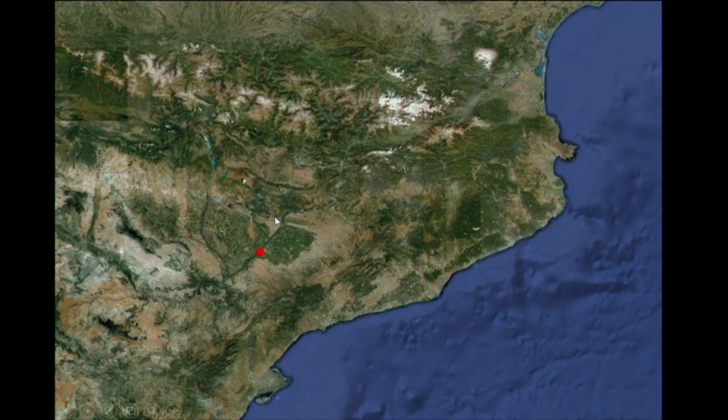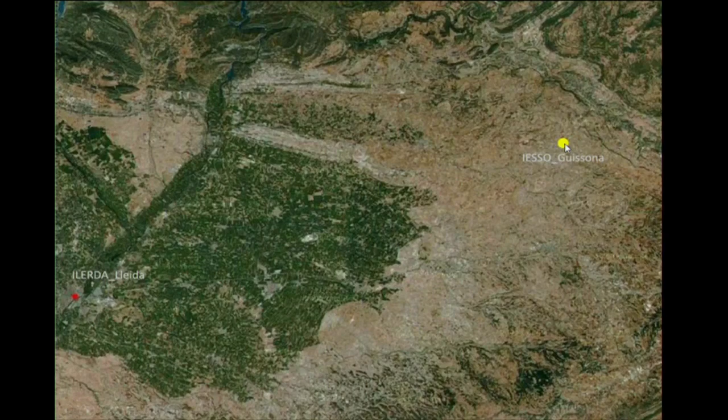And here, the Roman people, when they arrived from Italy via the Via Herculea and after the Via Augusta, in the second Romanization, one of the sites they established is Iesso, actually Guissona city. Guissona is in this part. Here is Ilerda, Roman Ilerda, in actuality Lleida. Guissona is in this part with an agricola system where they worked with wheat and different elements.

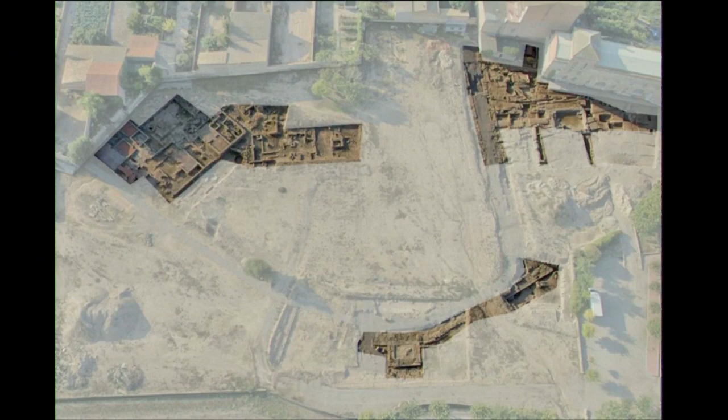They work principally with the earth, because they take this material, put it outside of the archaeological site, as store sites, and then we work with the same material. The decision was not to put the water outside.

Because if we do a canalization, we need an inclination with these canalizations, and under the earth we have the rest of the archaeological remains. We decide to work with lamination surfaces, like rice fields, and with this earth we build different taludes, compacted.

When it rains, the water goes to this side, and during the next days after the rain, the earth filters this water, protecting the rest that is not excavated, and protected from this external water, the actual archaeological site, and the inundability is protected from this fact.

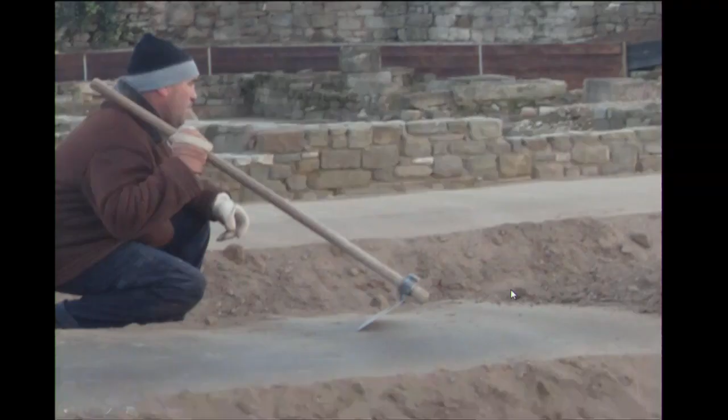This easy movement to move the earth another time from the archaeological movements will return in the interior, but with this geometry, and after compact with this technique, with slices of 10 centimeters, 5 slices of 10 centimeters, 50 centimeters, with the same attitude as the other people.

This is the builder or agricola man, and works with this technique, working these new fields, but it has the conditions that protect from the rain, that it builds during the time, builds, the time not destroyed.

The time is a process that in the first summer, some rains make this first movement, after in the autumn, after with the cold in winter appears this kind of lichens, and after you cook all the plate, in this case, and the time, like in the kitchen, you use it to build, and this is part of the process.

But this geometry that we work with is the geometry of the ancient Roman city. We put the inclined planes and the taludes in the position that you build the cardo maximo, cardo minor, intervallum.

And the different insulas that you have under this earth with the actus, and we offer one system so that in the future archaeological campaigns, people have a system to continue their work, the archaeological work, okay?

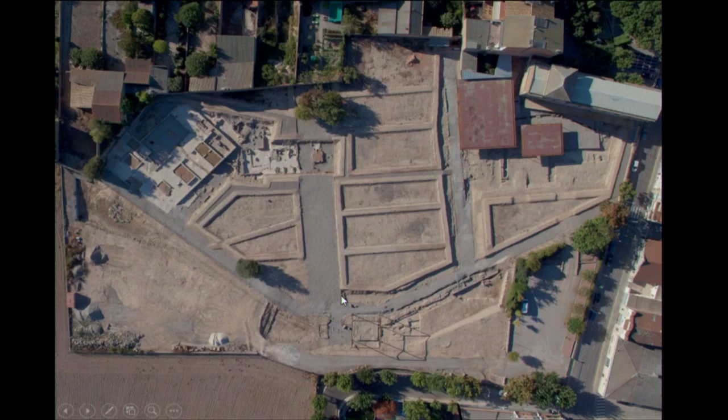The tower, we work with only the perimeter of the height that has the ancient muralla, and from this situation, with minimum resources, we put in value this action, offering a new system for the future archaeologists.

This is the budget, this is the surface, and in the limit of the north part, we work with similar instruments to all the lands that are worked around with the agricola system, but with an archaeological program.

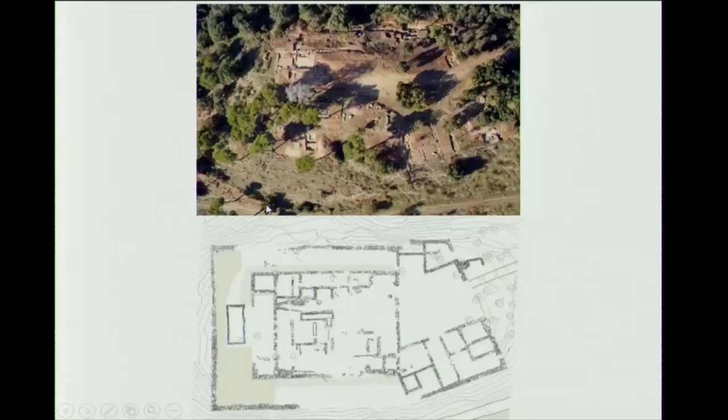In this site, in this south part, we have this element that was 70 meters higher than the rivers. This archaeological site in 2008 was the plain of a Roman palace, where there was an important political or military man that came from Rome to control the execution of Via Augusta.

This was 100 years before Barcino, before Barcelona, and 100 years after people of this site go to the city—this is only a temporary situation. He lives here with his family or his people, protected maybe by soldiers or people that work for him. This is the first protection, fortification. This is the second one with the house, the domus, with an impluvium here, a patio de armas, one tower, two towers, three towers, one cistern, and the big cistern tank on the other level.

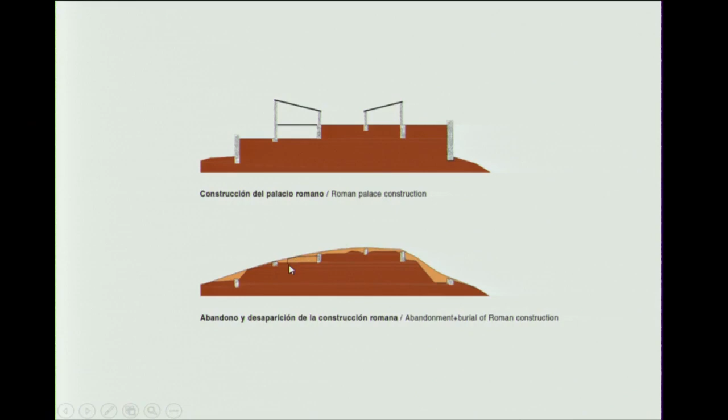This is the generic section of the Roman condition. After the abandonment of the Roman construction, during centuries it disappears, and then the archaeologist rebuilds a new condition, a new situation, discovering the ruins, discovering different elements of these rooms. Working with these elements—in this case not only earth, but also rocks, Licorella stones—this new reality appears.

And here they needed us to put in value with a contemporary program and a site that people can visit, putting in value the restored remains and understanding what it was. But...

I think trying not to rebuild the ancient condition, but putting in value the matter, the real Roman walls. In this case, we reuse the same material that the archaeologist put on the exterior. We reuse material from one ancient Roman quarry that is 100 meters near, and we build the back part of the Roman walls with a new system that builds these horizontal planes where the Roman people used to walk.

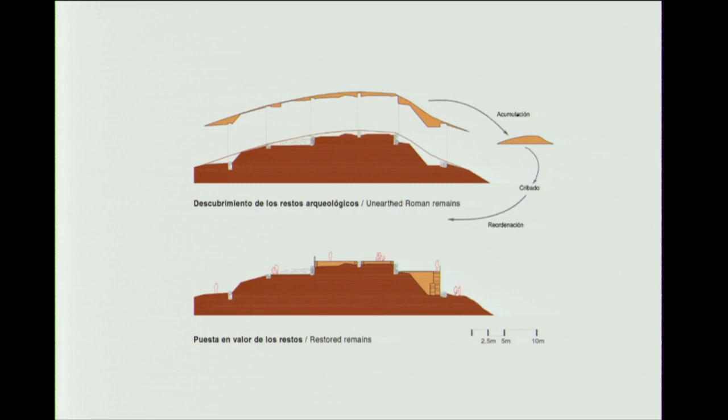To do this, we work with a dry system, working only with two materials: the stone of the mountain and the steel of the industrial polygon. This is the movement that we do—we put the matter into the rooms and we put in value the air that is in the walls. The walls don't exist, but the air explains the ancient dimension of the walls.

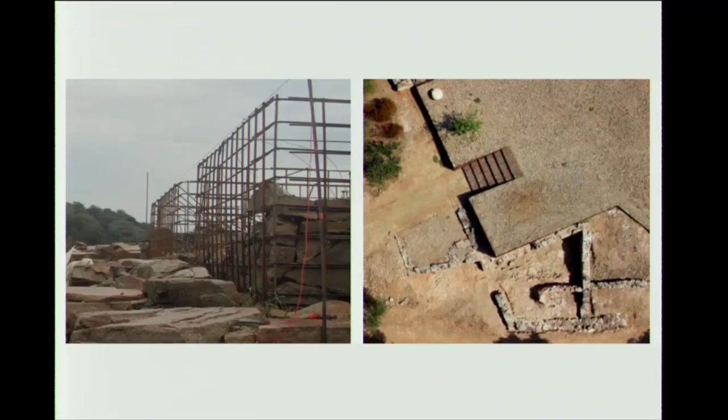This is the system, 15 centimeters separated from the Roman stones, working these lines—the entry, the patio de armas, we put an almond tree, etc. These are the first indications from the archaeologists to explain the different lines that we needed to build, the system of traction and compression of the different walls. This is the whole cycle of the process, from the Roman people to the restored remains.

This is the Roman walls that 2,000 years ago arrive to this level. This is the level where the Romans walked, but now we offer this condition, putting in value this air that actually doesn't exist, but the foundations or the first stones in the first meters of this rest do exist.

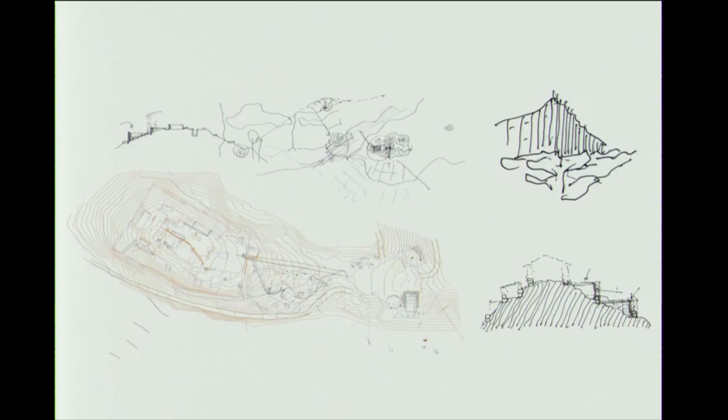During the construction we lived with the archaeologist. Here is the first weeks of construction of the domus, of putting in value these principal walls of the domus. It's a fantastic moment where we work as a team.

Then we contain it with this structural system, but after we put a thin curtain with even thinner rebar—this is 10 millimeters, this is 6 millimeters, this is 15 centimeters, this is 3 centimeters—because otherwise the two Licorellas, the one from 2,000 years ago and the actual Licorella from the ancient Roman quarry, undergo the same process of oxidation, and it seems like the same stone, but there's 2,000 years of difference.

So we need this thin curtain, using the tangential vision of the steel or the frontal vision, to put in value the Roman stones, and to put this curtain in the time that separates the two elements.

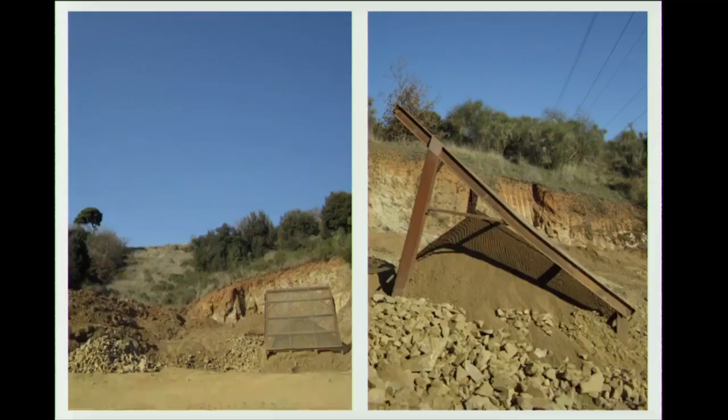But as you see in the other part, the limit that we work here in the more external parts, not at the top of the mountain, we work with the same structural system that we put as a veranda, because the difference of level is 2 meters or 2 meters 20.

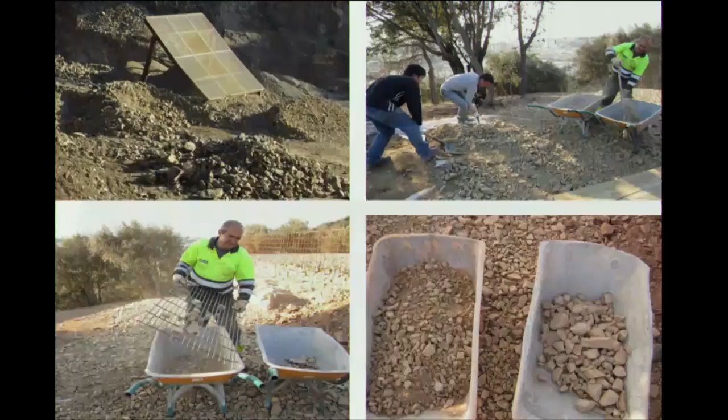And this is the ancient Roman quarry that we reactivate. The last activation was in the 17th century, and we reactivate it, and after, when we finish with this new material that we need to find, we put earth, and actually the local vegetation activates the new place.

We built this filter, and after, when the stones arrive to the quarry, with this we built all the carpet, all the pavement of this 2,500 square meter situation.

The archaeologist wants gravels of colors, orange, white, etc. But for me, it was an external element superimposed on the site. At the end, they understand it's better to work with two kinds of stones: thinner ones for the parts where you need to walk, bigger ones where people don't walk. And then we built this plane, all this surface, and the project has all these conditions.

With all this budget, we need to put this element in value, but we need to build an information point, and maybe I propose to build different pavilions, because this mountain is a cultural site protected as a natural site and archaeological site.

And there arrive people, guys with the schools to study the flora and fauna, to study the archaeology, people on the weekend, etc. So we offer 5 pavilions with the same budget.

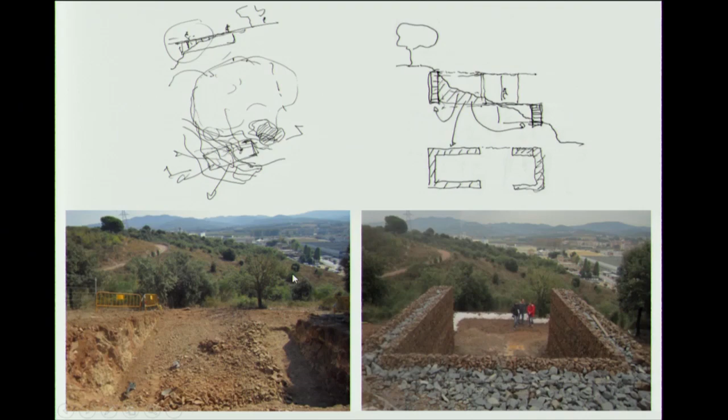The first one, the principal, is this one. That is this element, that with this material that we take, we put in the perimeter to build the structural elements. With the same material, we work this terrace.

And then we put one concrete roof that arrives here. This is the movement, and we work with the topography. This is the pavilion: interior pavilion, external in the terrace, winter pavilion with the sun in the roof, with these trees, another pavilion with these oak trees, taking this material and putting it here, building this circular horizontal plane.

This is the third one, protecting this tree and this tree. This is the pavilion of oak trees. This is the roof pavilion. After, we see how time builds this place.

This is from where you arrive, from the ancient Little River. The entry, the same earth, the granitic earth, entry in the interior.

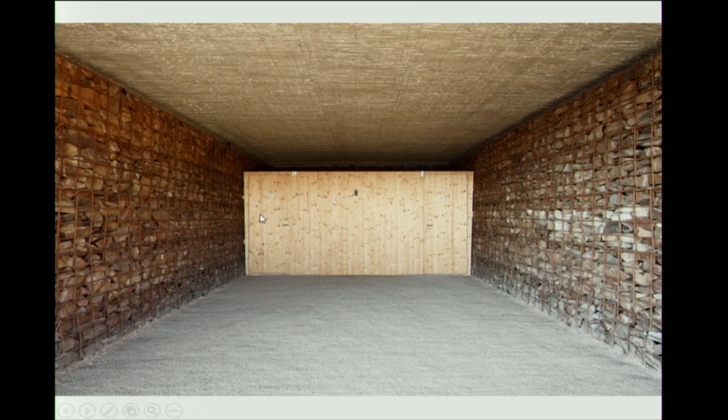You can open all the protected element and the glasses, a little box to have a storehouse for the archaeologists, and the bathroom. Here you have a screen, normally if you want to explain something, for temporary exhibitions, etc.

External bench, facing the first sun in the morning. And actually the winter pavilion is like this, with these spontaneous new elements.

Here is another pavilion with more oaks into the forest. This is the pines, this is the oaks into the forest. There is a big pine with the shadow and it builds this part.

And after, we see this element into the forest. This is the pine and this carpet where you have shadow, you have sun, etc., in different moments of the day and of the year.

And in the interior of the forest, we built this archaeological site for the children, to discover and make the first situation, working with the shadow of these oak trees, and this bench for the parents, etc.

And after, another important element is this pre-existing forest, where we designed one element that works like this.

Working with the time, which is 1-2 minutes that you stay from this part to this part, entering the forest changes your connection with this element, and in this movement working with the inclined plane and this long way, arriving to the top, and at this point you discover the archaeological site.

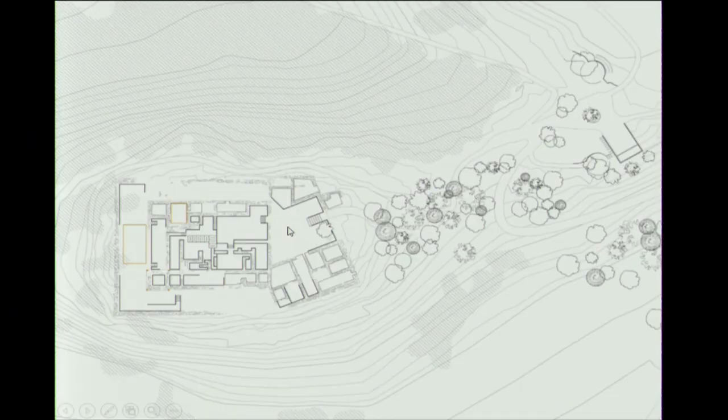The new almond tree, the entry, the horizon, contemporary horizon.

The tangential vision dissolves the stone, or here is enough curtain to put in value all these elements. Like in a theater, this is the actor and this is the vertical plane.

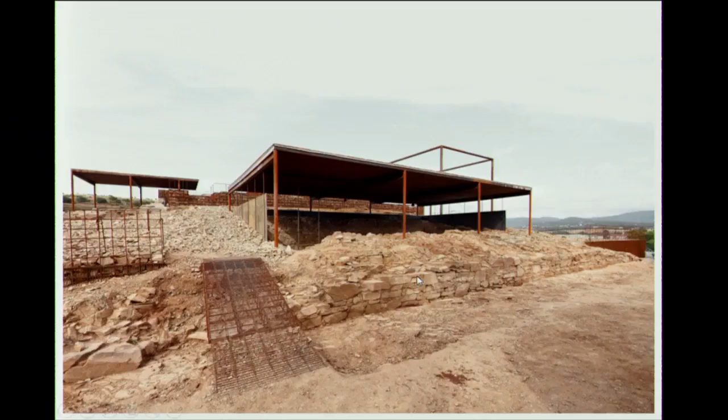These two roofs protect a wall of earth, Roman earth, that is under this roof, and here the big cistern tank. Neither of these two planes is higher than the last one, always under this horizon. This is the big cistern tank that we can enter, with this opus signinum pavement.

The tower serves as a reference point of the site. You can enter this room previous to the tower, and after you can enter into the air volume of the tower, and have this experience in this little balcony, and two big balconies where you see the contemporary situation, in the limit between the natural condition of the mountain and the industrial condition as a contemporary landscape.

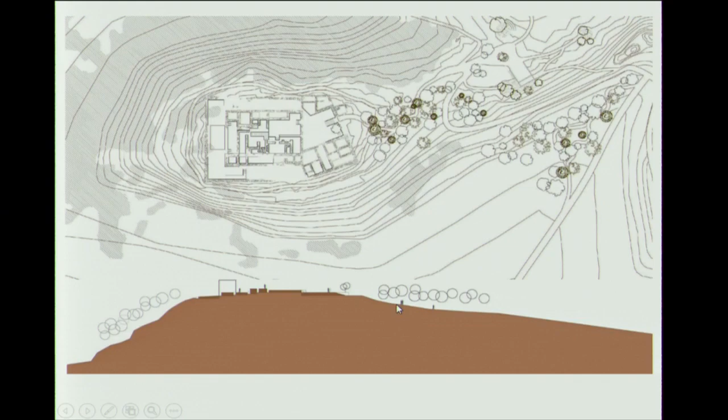And the different platforms that you can recognize from the village. And this contemporary situation in the contact between the fragments, as a contemporary landscape.

And this is the transformation with this minimum intervention, with this European budget, FEDER money.

And the third one is the first intervention that I did 16 years ago, 15 years ago, in the other part of this mountain, in Vilassar de Dalt, La Fornaca.

This is before Christ, and this is after, when Barcino exists. And at this point there is a Roman industry of ceramic dolias, ceramic roofs, etc. This is Cantacó, and this is Vilassar de Dalt, La Fornaca.

We work in this site that during the last 50 years transforms with new topographies, contemporary situations that now we're going to see. But in this image we see the quarry, the granitic quarry in this case, from where we take the material to work here.

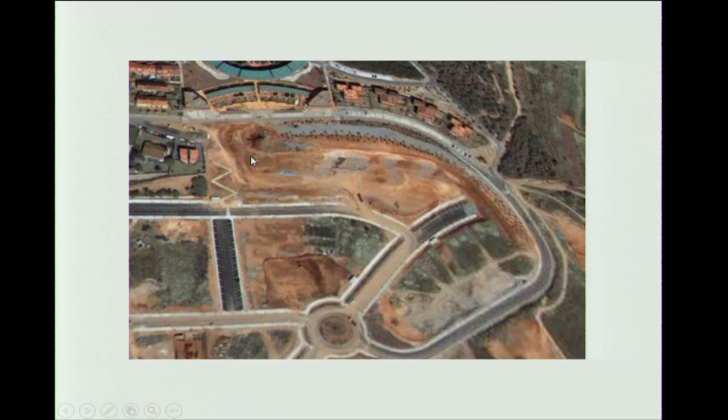And in this site, this is the industrial polygon, these are the movements, and in this part they find these 3 combustion chambers on this side, which was a vertedero, a dump where they put all kinds of contemporary waste materials. And in this part, this is the archaeological site -- they find these oven chambers of combustion, of 3 Roman ovens.

Of ceramic. This is the chamber of combustion. One is destroyed -- this is like a section that you see -- and the third one is like an igloo. Here you see the wall that they built, the site where they put the tiles and dolias, etc.

And here, from one hole, they put the wood, the fire, 800 degrees, and after, this temperature cooks the ceramic elements. In the interior, with this pillar and these different holes, you have this light, and you see the movement with this spiral -- from the east entry, the dominant wind from Levante, from the east part, enters the wind, and after makes this combustion and movement going to these different holes.

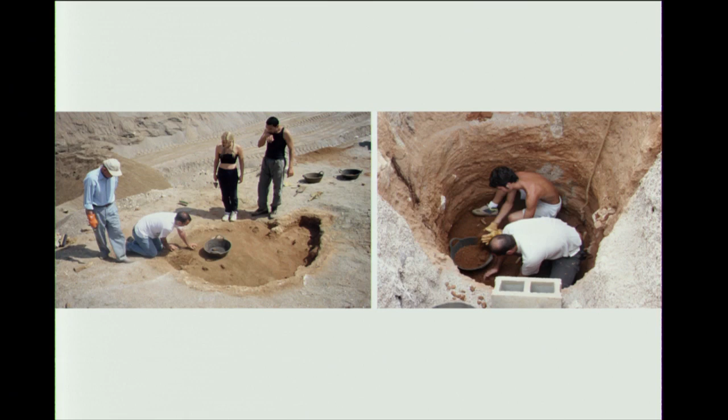And actually we see this fantastic space -- it's the biggest chamber that we have in Eurasia with these conditions. These are different wells of material, silos, where they discover Roman material that they rebuilt in the museum.

But the site, they want a museum to show the combustion chambers of the ovens. And they gave me this drawing in 2002 — the people from the town hall, the people from the Generalitat, the Catalan government, wanted this contemporary facade with glass, with this structural element that you see from the exterior, these jewels. You can enter and work with the topography using steps, to visit and go.

I tried to convince them, and at the end they built this option: to build only a geological stratum, a wall that you need to cross and discover the other part, the other side, crossing this limit into new spatial and time conditions.

At the top there is a park they were building with a horizontal plan, but with this movement we put the wall facing the east orientation, where the principal wind comes from, the Levante wind. In this direction you open the park with this square at the top, and there you see three holes that let natural light illuminate the three combustion chambers.

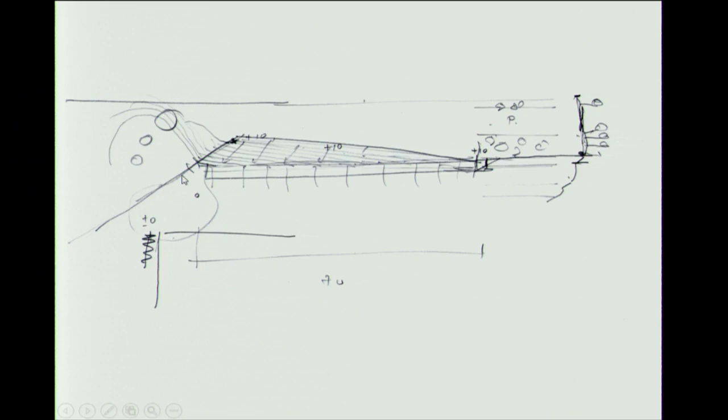At the end, this new site — I don't know if the name is 'building' or not, it's a new topography, a clay topography, entered as a natural topography with the three ovens. You have a lot of thermal inertia; here you always have 19 degrees of temperature.

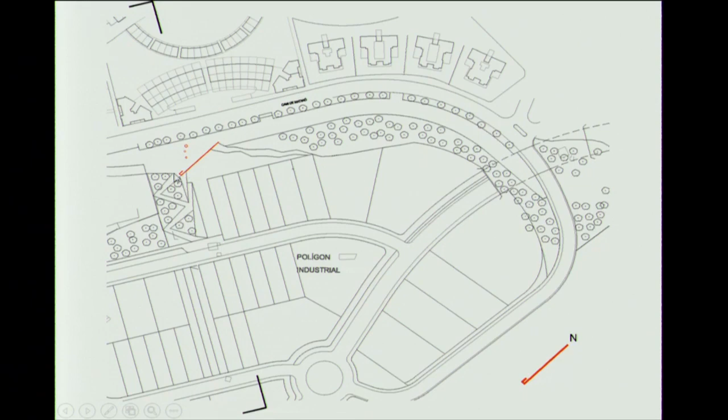At the entry, you work with another chamber. We have the three interior chambers. Here you have a contemporary chamber of 3 by 3 by 3 meters that you enter, disconnecting into a black box, and after touching the curtains, you can enter and discover this site.

We maintain two lines as holes in the facade to let in the east wind, the wind of the rising sun, and you always have this ventilation through the geometry of the wall and the orientation of the facade with the wind. In the exterior, we activate the reflection with inox, brilliant, like a mirror effect.

And with this awareness, we activate and accelerate the timing of the people, and then with this intermediate space, this chamber offers decompression, entering a new space with a new scale — a scale of time that doesn't stop, because it's not possible to stop, but it becomes slower.

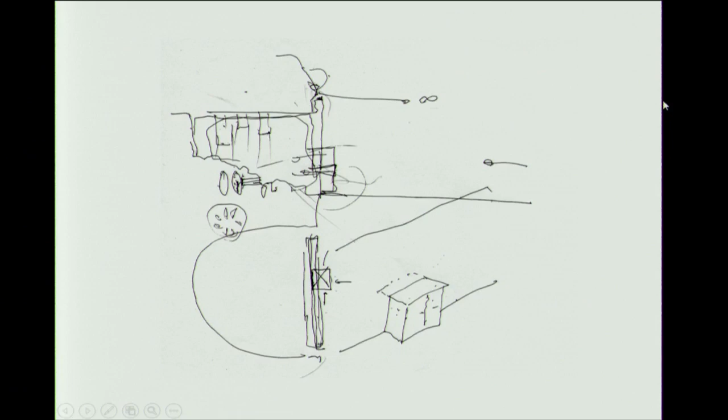And then the project has two dimensions: this intra-uterine condition of the chamber, and the opposite — the infinite scale of the horizon of the Mediterranean Sea.

In this diedric drawing, we only have the horizontal plane excavation and the vertical plane excavation. Taking this earth, we built this space for these elements: horizon, stratum, wall, and cave. These are the three points of the principal decisions of this project.

The reflection we activate, and after we enter into this space.

And the fourth one is more in the south. It's a process of the last five years, from 2013 to this May — last May was the inauguration of the first phase. It's in Tarragona, in Roman Tarraco, an important city, the most important city on this coast, a Roman city.

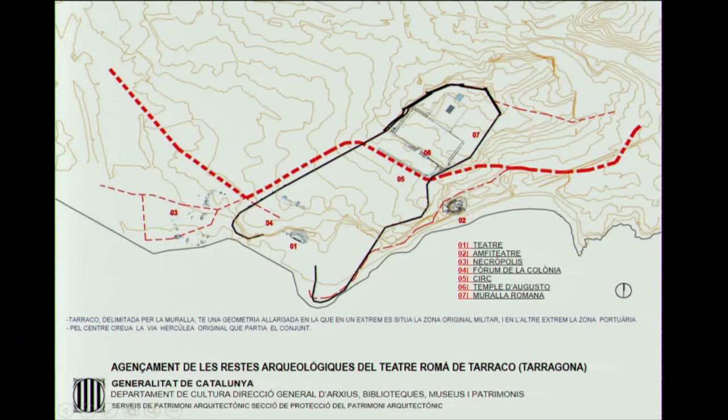This is the contemporary Tarragona, with different archaeological sites that you can find here. In the exterior of the defensive wall, you have the Coliseo, the amphitheater. And actually you have a big urban void of 6,000 square meters here.

And you have here one Tarragona that people don't know. People normally visit this part and this part, but here the continuity in the city breaks. And then with this project, that at the end is a public space project, not only to put in value the Roman ruins, we read these contemporary Cardos and Decumanus.

The Augusto part with the actual town hall and this square in the north, this square near the actual port in the south, the important door in the city as the train station in the east, and the ancient necropolis with the new cultural element that is Tabacalera in the west part. And in the crossing point, this condition: if we activate this site as a public space, maybe we can activate this platform of the port.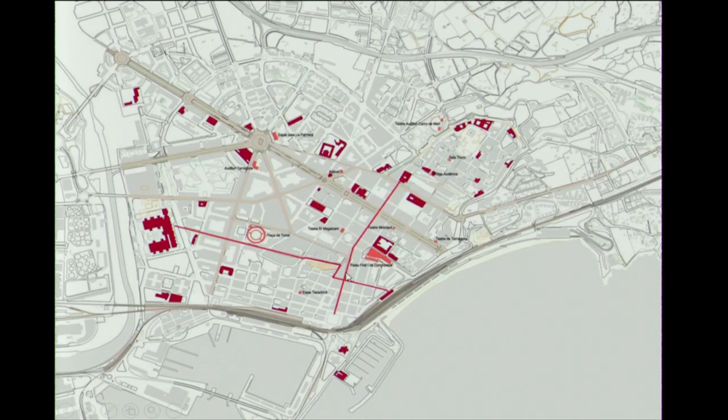In the city, there are different cultural associations that work with the theater and this kind of events, and maybe they can work in this site too.

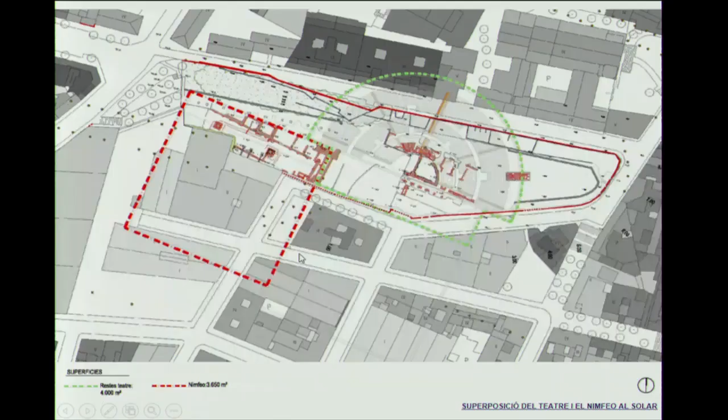And actually you have only these stones of the first part of the cavea. This is the theater and the Ninfeo.

This is the first ideas in 2013, to activate as a descriptive geometry exercise, to activate the lines that generate the form, the Roman form, because at the end, in this first phase, we want to put in a scale and in geometry these Roman stones.

And then there are another intentions in second and third phase to activate this line, this hard line that actually is a wall between one public space and the other future public space, and work the limit as a pedestrian site.

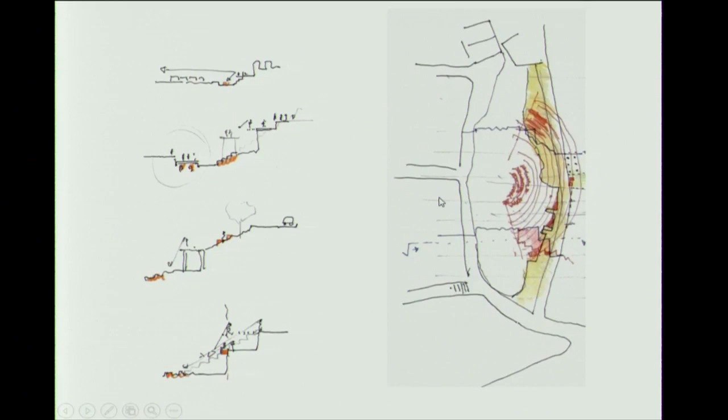Working with this kind of sections, the conscience of the sea, the relation with the Roman stones to cross the site, and in the first phase activate this element that in these drawings you don't have now. This is the future situation of the public space, working with this limit, maybe in the corner one kind of public building, but the Roman site is the origin of this interpretation.

These are drawings from 2014, I think, where we activate these elements.

But the most important drawing for me is this, where you have one new element that appears 130 years ago, in the end of the 19th century. That is the archaeological site of Roman theater and Ninfeo. It's a new reality, it's not the Roman theater, it's the archaeological site of the Roman theater.

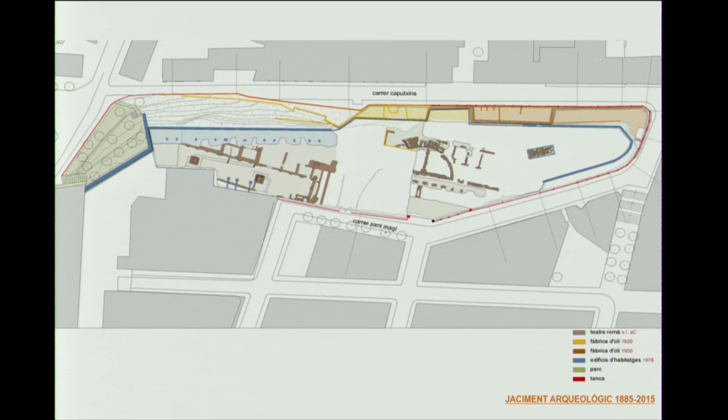In the 20s and 50s, they built two factories of industrial oil and worked with concrete walls, yellow color and brown color. And in the 70s there were two promotions of housing in the desarrollismo moment, that architects and the collective of architects and archaeologists stopped in 1977. And after all this stopped for 40 years, now in 2018 we reactivate this site, putting in value the ruins of the theater.

And then all this natural ramp, that is the streets, we incorporate as a public space in the next phases, working this red limit as something with intermediate spaces, etc. And in the future, maybe we have this new topography, not with this abstract drawing with these whites, etc. It's only the idea in this case, but as you see after, we combine the public space and these new programs using the ancient structures of these four topographies that we have from before the end of the 19th century and during the 20th century.

Okay, but at the end, 5 years ago, we had this big space of 6,000 square meters with different matters: Roman ruins, housing ruins, warehouses, factories, etc. I took these photos 5 years ago, where you see how these different matters cohabitate.

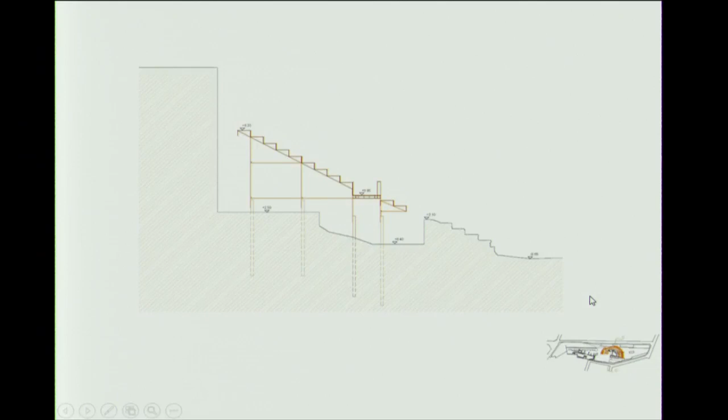We work with these vertical elements as micropilots that are the foundations, but we use them as pillars too. They are 2 meters 50 to 2 meters 70, at human scale. On the side with a bigger scale, you use this element to bring the body of the people into scale. After this level, we work only with rebar of different diameters, from 40 millimeters to 6 millimeters.

The unique site from where we can walk is the praecinctio, okay, 4 meters and a half higher in this part. And for the other condition, at the end we decided not to build this element, and we built the plane with granitic sand. We built the plane of the orchestra and the entry of the senators.

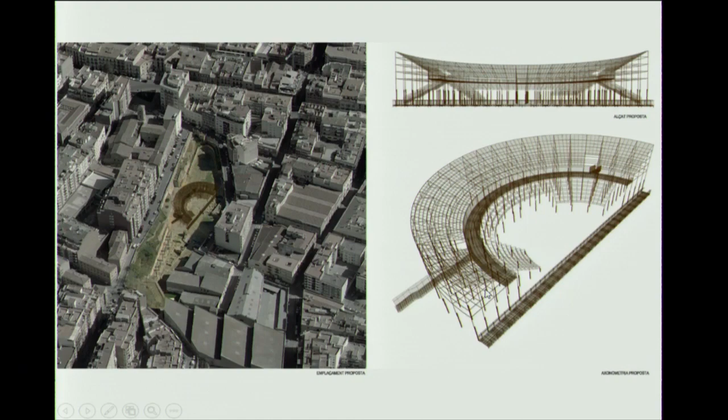But this platform, at the end, I decided not to put only this one element - with sand we worked and built this horizontal plane.

When we began the works on site, we found a new archaeological site, and we needed to change important decisions during the work, because it changed all the topography and political decisions, and we needed to recalculate all the micropilots and their positions, because here it's not possible to put one, here yes, etc.

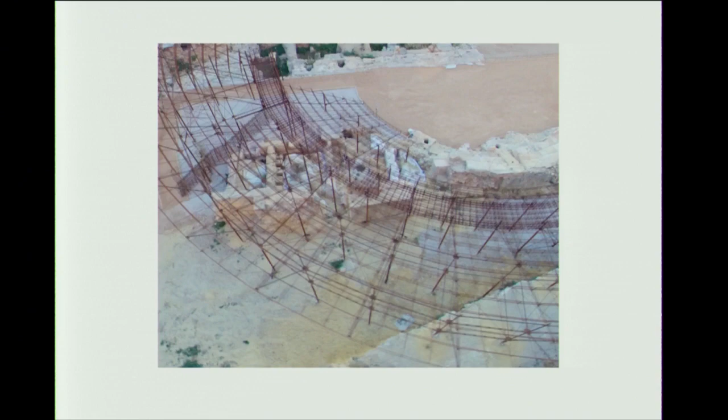These are the 96 micropilots that we used to work as foundations, and we use them as a forest of pillars to bring the people into scale.

This is the first phase finished, the relation with the actual port in this new platform. In the future, you can cross this public space visiting this site.

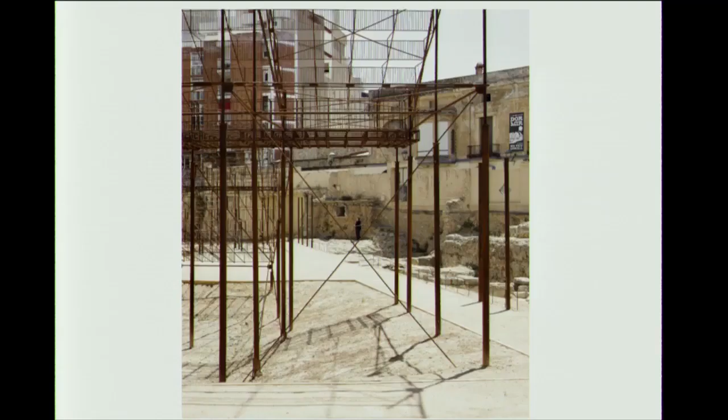Oops, sorry. The scale, okay.

At the end, all these matters enter in harmony, combining these 4 time periods, and a new frame, a new topography in time, that puts these stones in value as a contemporary situation, as a contemporary public space.

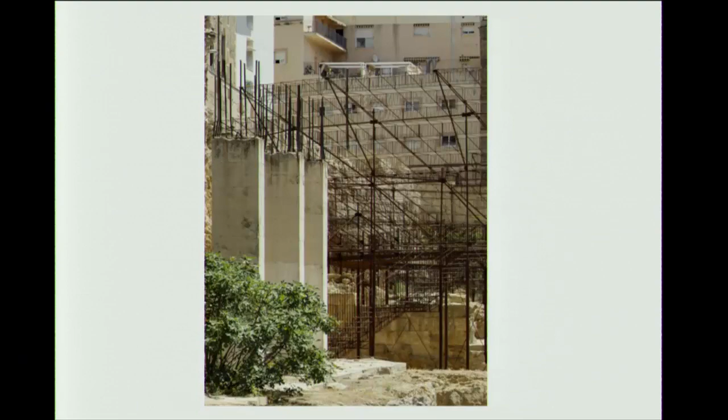You can enter the vomitorium, the Roman vomitorium, in the same space but in a different time, and discover this new contemporary theater with the orchestra, the senators' entry from these corridors, in the same space but in another time. Put the chairs, the big chairs in this part.

This is the access to the port with the water, the rainwater. It goes through these holes, and this is the canalization.

And this Roman condition, seeing this frons scaenae - actually there is another theater with this contemporary situation, another actors, other people that are seeing, other people that are acting, etc.

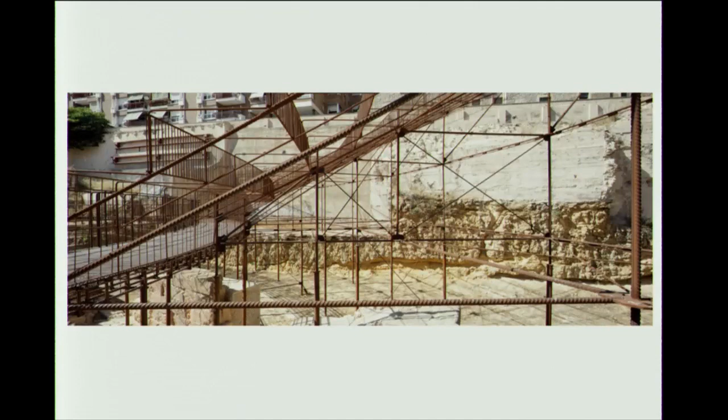The arachnid element that builds all these grids. The contemporary situation with different frames, the vomitorium, the actors too.

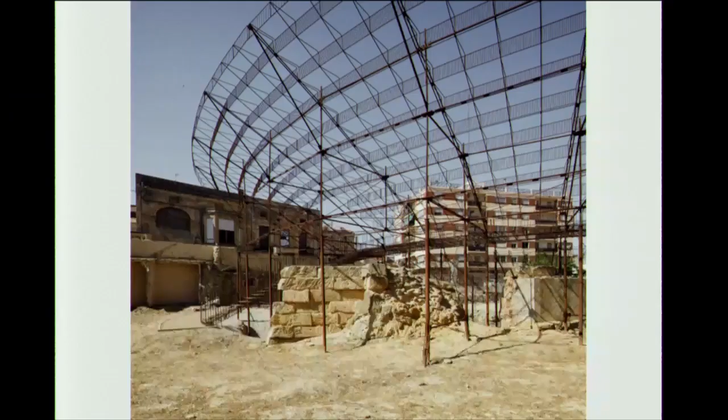Now I explain the last exercise, another time in the Lerida platform in continental climate. Now we explain Iesso, Can Tacó, La Fornaca, and Tarraco here. These four red points were Roman time, and the yellow is Neolithic moment. And there is a little village called Sero.

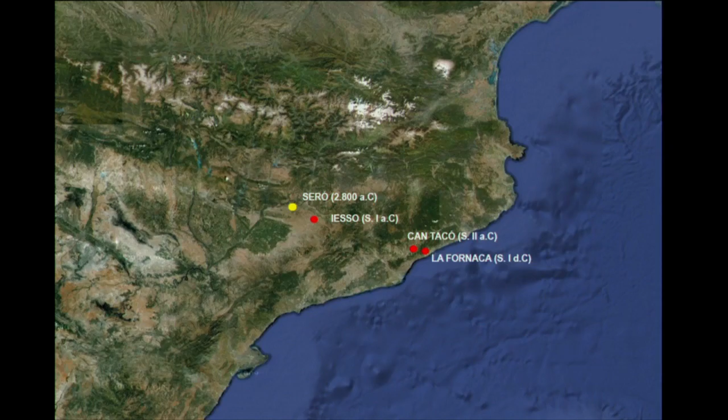I explained this exercise, and in some moments of this exercise I put it in relation with other exercises that we worked on in the last 20 years in the studio, putting it in relation with the conditions of inhabitability, to close the lecture.

Iesso is an agricola system in the plain, but Sero is an agricola system too, at the limit with the Pre-Pyrenees, where the Pre-Pyrenees arrives and finds the plain of the fields of wheat. Different than in Iesso, all these geometries are the result of where the forest and the little mountains enter in contact with the fields, creating these fantastic situations with semi-horizontal plains, ramps, and taludes, elements that put this fantastic mesh in contact.

Sero was a stone village till the 19th century, and during the 20th century this clay village appears with expansion of the agricola system, with warehouses and farms of pigs. Lleida is an important exporter of pigs to Europe, combining these two typologies, these two systems of construction, from the stone to the clay.

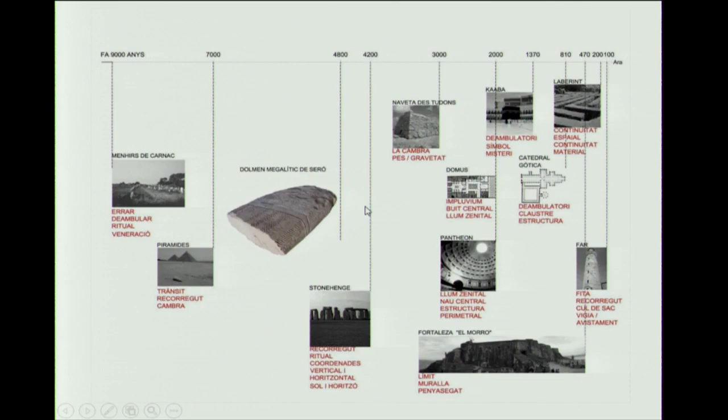They said we should do an avant project to obtain money from FEDER funds in Europe. During the process, we fabricated the program, the site, and the budget. Different conditions of Carnac, the pyramids, Stonehenge, impluvium, central void, zenithal light, continuity, spatial continuity, material continuity in the labyrinth, etc. These are the conditions we were interested in for transmitting these stones.

This is the site we found at the entry of the village, with two ancient orchards, an oak, an ancient school not activated at the moment, and the principal square where they have the balance, where trucks with pigs arrive with the weight packs to know how heavy they are. There's the Plaza de la Báscula, in this case, and from this level to that level there's a difference of 3 meters.

This difference led to the first drawings in 2008, an intuition that we needed ramps, something to activate the two levels. It's a promenade, a public space, and for the stones and the drawings we asked if it was possible to work with one secret chamber where we need to enter. We didn't know how at that moment.

We asked for the conditions: if it should be protected from the rain, they said yes, but it's possible that the natural air crosses, so the exterior part enters in the form of air, sounds, smells, etc. But this was only the first drawings at that moment.

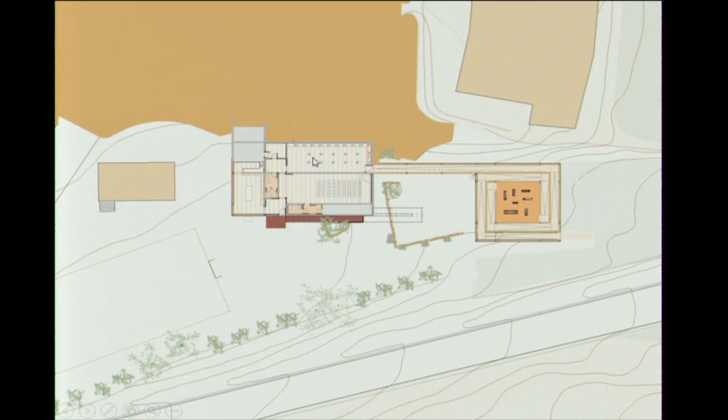From the exterior of this platform, you can enter other platforms at different levels. This is the same level, this is another level. You discover from this balcony the site where they discovered the stones, and you return in this cul-de-sac with the view to the church of the village.

In this part, you can go from these ramps to enter the equipment. Here we think of one shadow for the afternoon, a vegetal shadow, with the zenithal light that enters the exhibition room. We maintain this orchard.

The stones of the other orchard we reuse as public furniture, and the two ancient trees we maintain as shadows at this point, and this one as what you see in the scenario of the polyvalent room.

And in the park, we proposed to the mayor that the neighboring farmer enter this part and put in the wheat. They maintain the wheat, and you have one field of wheat, and they maintain and have the contents of this field every year.

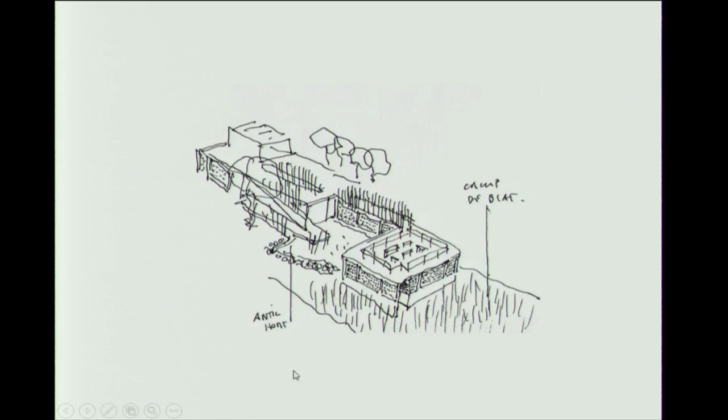We enter the territory of the public construction. For the limits, we work with the human scale, and we built one limit of 1.90 meters high.

The shadow, the ancient rocks of the ancient orchard, and at the end we work a lot with the sections, because the plan is so rigid, since it's not possible to move with the scale and the neighbors, the national road, etc.

But the section is so dynamic, and then you can break this element in the site, as you see in these different sections, working with the void and the built part.

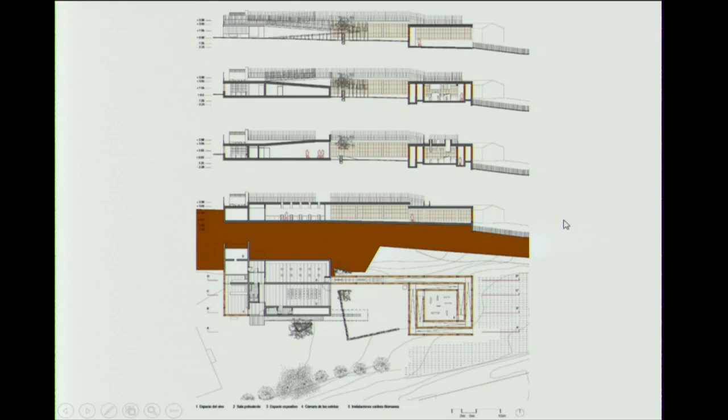Transversal section, the same. Here the air crosses completely, through the orchard and the neighbor, crossing the channel, the first channel, thermal inertia, and the exhibition part. Here the room of the wine and the installations part, with this caldera de biomassa, with the pellets entering this part.

Here we build this inclinated plane where we put caducifolian leaves that create this shadow. This is the structure of this pergola, but at the end we are interested in the design of the shadow, the vegetal shadow.

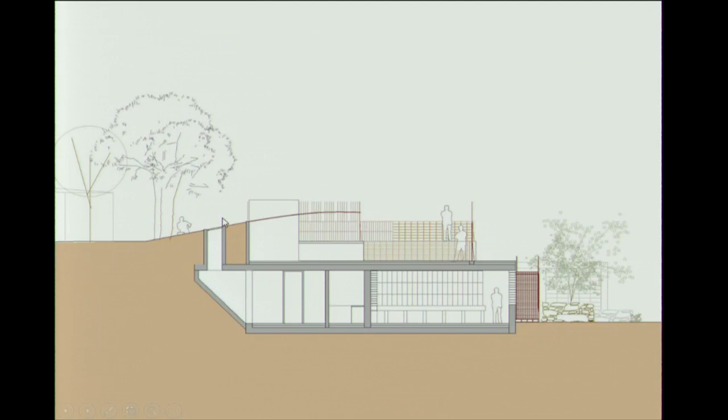Here we put 5 rebars of 6 meters. Here you have 1 meter, 1.5 meters, and here 4.5, 5 meters. With the gravity force, you have the natural geometry, and after, the climbing vegetation makes the final form of the shadow.

After, I explain how we work in this limit with this material, this is the inclinated plane. This is the vegetal material as a construction material.

We work with Parthenocissus quinquefolia, a kind of climbing vegetation that works with tendrils, making this movement, and it works perfectly with linear elements to make the mesh and build this grid.

The shadow, the carpet—here maybe this condition of working with the vegetation in the social housing in Salou, we work in a vertical plane with the same plant. We built this element that refreshes the mistral wind before and after crossing this forest that we planted with caducifolian trees. Here we produce a Venturi effect with accelerated vertical air, and when you open this window, you refresh all the social housing. Different apartments each have one plant that every person can transform as they need.

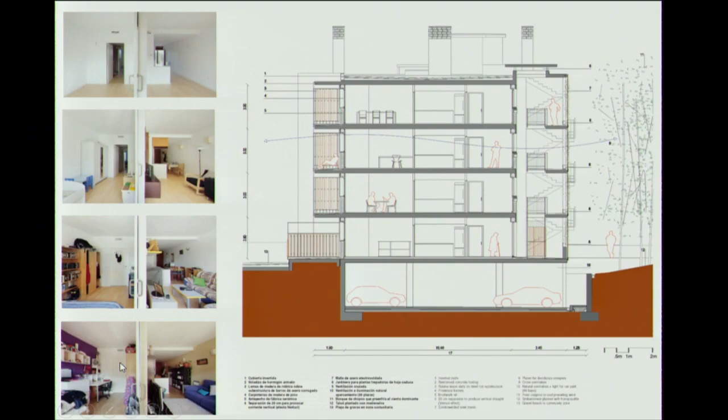And after we see how, maybe in 10 minutes, you see how they transform the external parts in this 80-unit social housing.

We return to zero, the carpet, the public space. You enter one room in this carpet, the same system that we used with other materials in La Pedrera, in an action installation we did 12 years ago, working only with paper—40,000 pieces of paper that we later recycled to do an action as a denuncia of how industrial society works with the excedent.

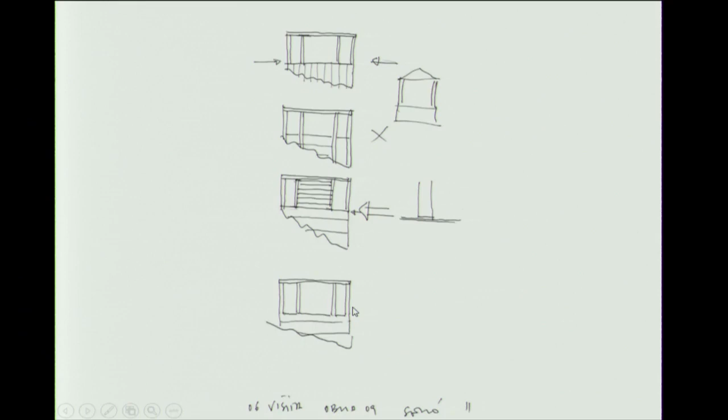The vertical element we work with is a fisherman's grid. We return to zero—they normally work for the packaging of wet goods with these industrial structures. We put these elements in the interior that have geographical analogies, as an architectonical element, something like this. We work with these concepts to design and build the chamber, but here we need to work from the roof, not like the other elements. The idea of the zocalo, the structural elements, etc., follows similar architectonical movements.

We don't need a door here. We need one hole—the door is on the pillar on the other side for security, but we want this hole, the spiral at the beginning of the construction of this double spiral.

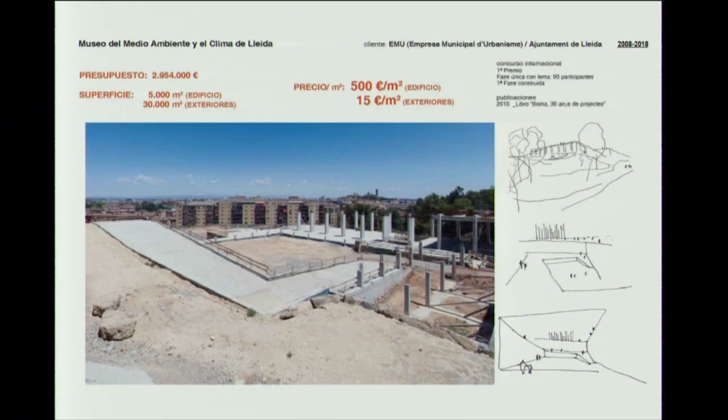The spiral—we worked with this element in the Climate Museum in Lleida, but at another scale. In this case it's 60 by 60 meters. In Seró it's 15 by 50. The square, the principal heart of the Climate Museum, is 30 by 30 meters, where we work with this structural element at the top that supports the future pergola of 22 glycinia plants that grow to 7 meters and a half at the top, and then by gravity reach 4 meters, leaving you 2 meters and a half of vegetal material from these holes.

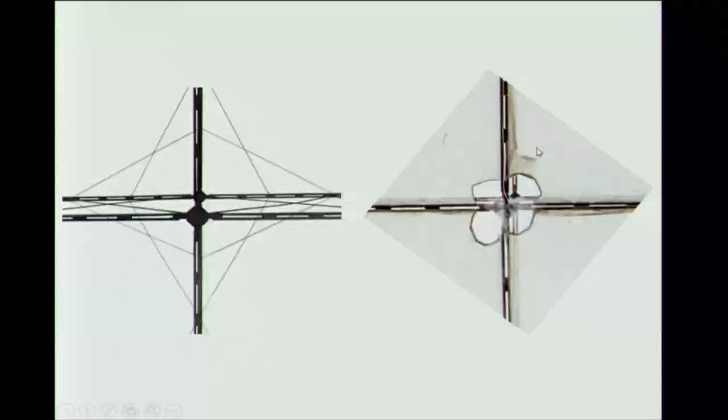Now we're climbing, and temporarily during these first years we work with agricultural tissue and water nebulization acting here. We work with this plane of shadow in summer, and in winter it disappears—it's the cheapest system. Over time these 22 glycinias build up until at the end you have this thermal element that works with the temperature, and you enter this space of the Climate Museum, a museum that you read from the skin, not from the eyes, as the principal sensor.

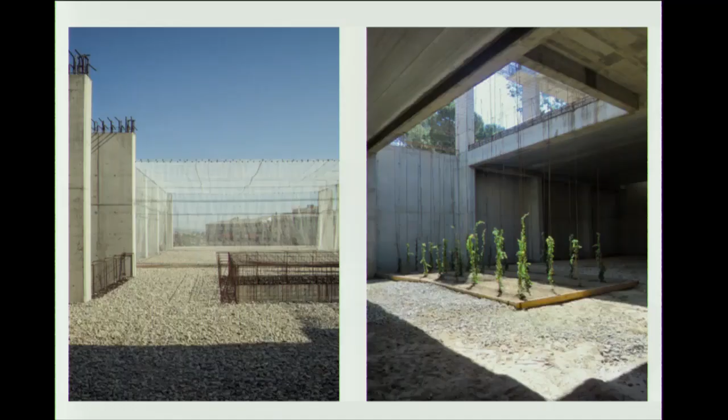We activated the space after the crisis because it's a space that stopped in its first phase in 2011, and in 2015 I proposed to the mayor to occupy the space and activate the steps of the museum. At the end, in this moment, is this element. In this moment I prefer not to finish the museum, because at the end, 10 years after the competition in 2008, people, the mayor, and all the promoters understand that at the end the Climate Museum is the Earth planet, not one building.

The bathrooms without mirrors—you see the pergola system, you enter the future with a garden with these climbing plants and thermal space, one space for men's, women's, but a mixed area for adult people and children. We recycle the structural elements that we don't use when finishing the building, etc.

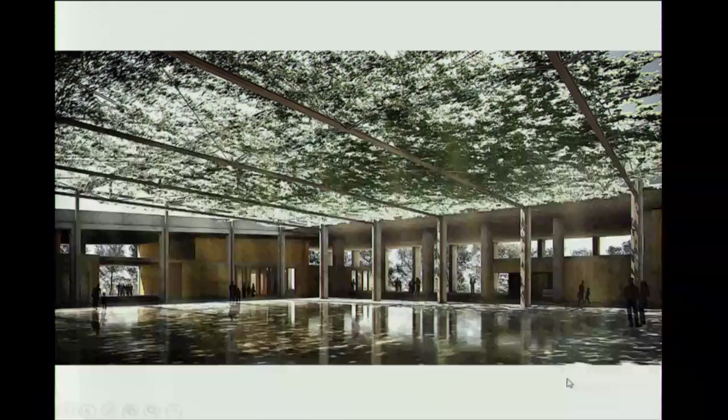The day of the inauguration in 2017, and by night it's a summer cinema. Here is the day of the inauguration. We work with the structural elements to design these lights. And in the future, if we finish it at maximum, we arrive at this moment with a lot of porosity, with glycinias, with this plant that maybe rainwater can activate this humidity, but if you don't need to activate the nebulization, autumn and winter appear, and you understand this clock, this process of the 4 moments in the Climate Museum.

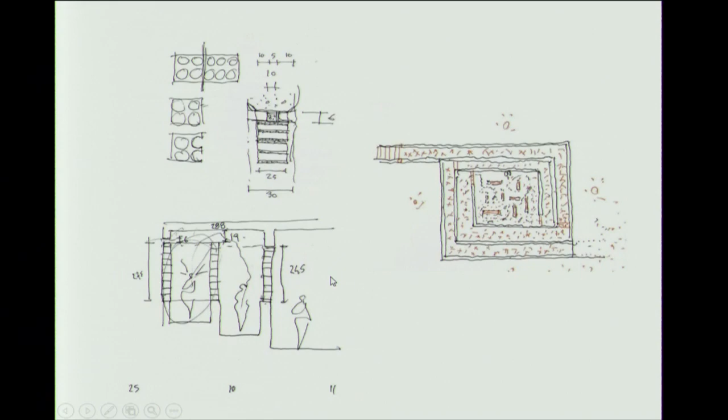We use the brick, half brick, to let the air in and eliminate condensation on the glass. The spiral, the different frames, like an onion. The piece we use, that we reuse conceptually as an object, is the element normally used in stores for wine bottles, which has the ideal condition of porosity for us, for transparency and tangential opaque vision, for air entry, and for an interesting relation between the void and the opaque or solid condition. For this, we chose this piece.

This is the density we're interested in. We're very interested in the ceramic for this porosity condition, not for the textures. In the last 5 years there's a word people use a lot that I don't like: 'textura.' Design with the texture. For me, in the end, that's just a visual way to work with texture. We're interested in the condition of inhabitability, and in this case, it's the porosity.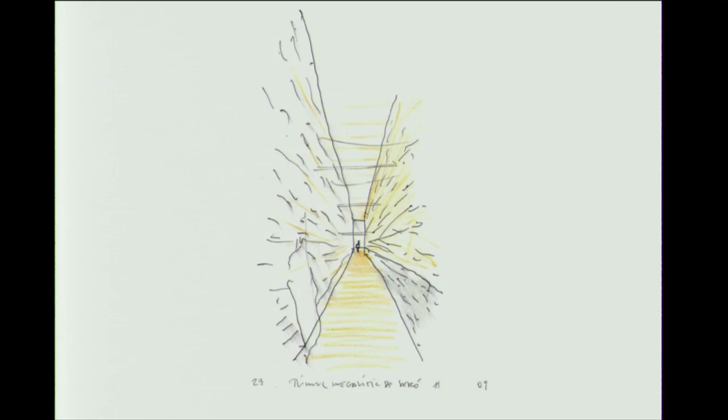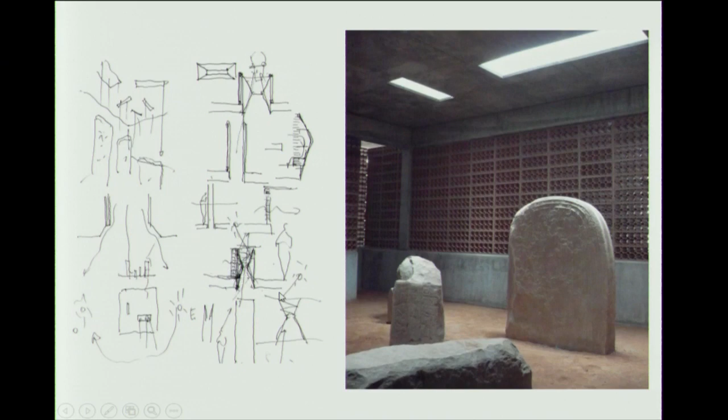How we built these tunnels, and we wait for the moment the stones enter to decide how to work with the light, because during the 3, 4, 5 year process, I don't want to introduce into this chamber any matter other than the stones. I think of different systems to compress the light and activate it with white color, etc., like in Roman ovens, the light.

In the end, I work with a model at 1:1 scale here, and decide to put the plane of light at 250 centimeters, not 370 like you have from here to here. I put one plane here with new elements that enter the chamber, in dialogue with stone elements from 5,000 years ago, and in the end this activates the light, and the real protagonist of this whole program is to read very well the drawings of the stones.

Then, in the end, these pieces enter painted in white to better activate the light, and to read very well each one of these 8 elements.

We go to the chamber of wine. Here we work with the same piece but in vertical position because it's the smallest element, entering in the vertical dimension of the body. In this case, we need to activate circulation horizontally. Here we need to stay and enter in this unique room.

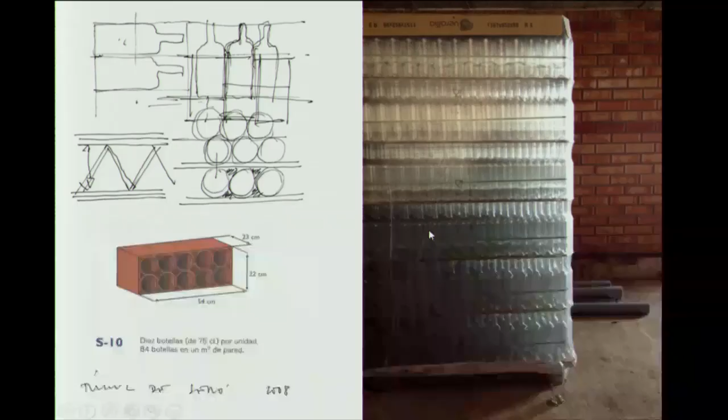Another condition is that here the climate is the same, exterior and interior. You have different frames with minimal difference. But here you have interior and exterior in a continental climate. We put plaster in the joints here, and work the limit with this intermediate element, which is the same bottles used for white wine.

We designed this prototype. We tried different bottles, but in the end we learned it works with a transparent bottle. This is the foam normally used in architectural installations, 10 centimeters thick, the intermediate material between ceramic and glass.

Then we put the bottle in this position, floating between the ceramic, letting light enter the interior from where normally the wine goes. This is the winter position with the corks, using as a thermal element the air chamber of every one of the 1,800 bottles. This is the summer position without cork, but only with cork in a series of 1, 2, 3 as black points you can recognize easily in this element.

This indicates, in summer, the bottles that have silicone in this part, so you can open them as little windows and provoke cross ventilation, working with the thermal inertia of this building that is under the earth, refreshing naturally the site where you taste the wines.

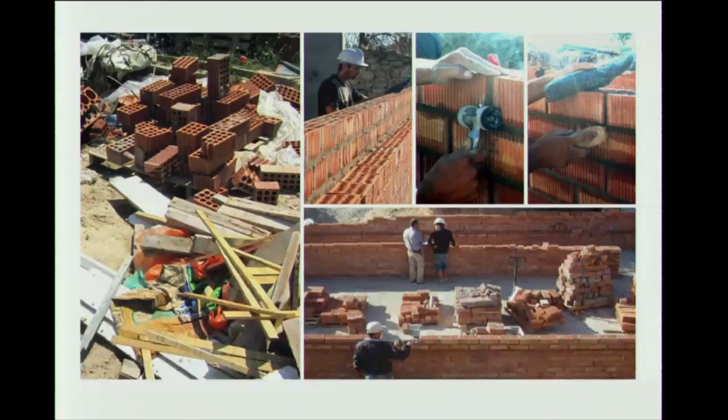We clean very well with water and these elements, and we offer at the end this matter and this atmosphere. In the roof, we activate the porosity of the brick with natural earth for the natural vegetation that appears.

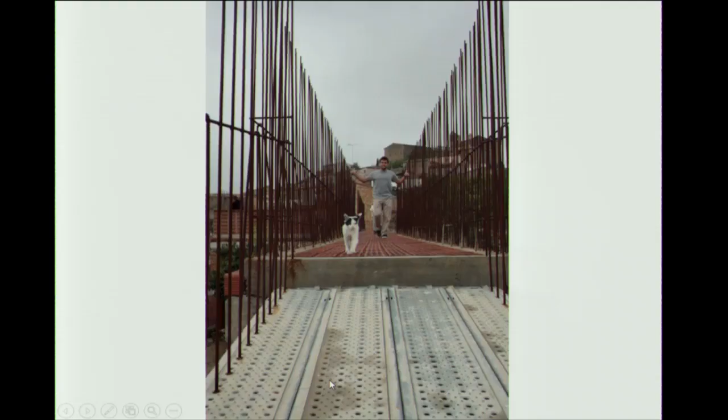At the end, all this matter enters in harmony, and we reuse elements like this in this place, in this little ramp before the chamber. We reuse this bench that a woman abandoned when these city benches arrived with a back element, and we transport it to the entry of the new site and put these ropes.

The same system that we used 20 years ago or 80 years ago, recycling these ropes in Cadaqués, from this installation that we do one time a year in Cadaqués, an installation that talks about the tradition of skipping stones, but as a public space. We put 10 lines, the horizon as a reference, this grid in this topography that normally is in movement, but we do it in the calm of January.

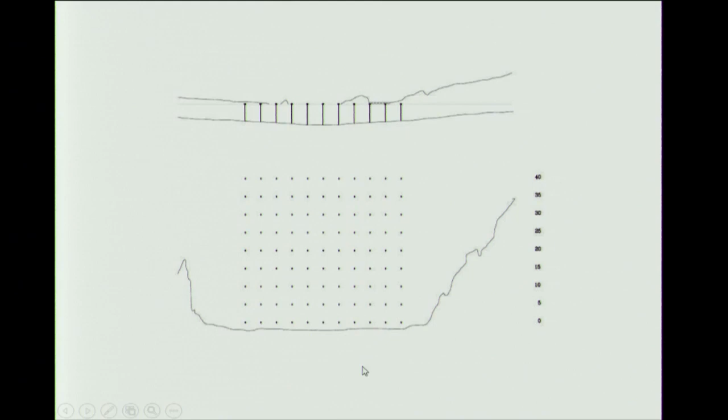10 people make the skipping stones. It's a plastic element in this condition, but in this moment, 20, 21, 22, 23 years ago, I think I designed it in 1995, I decided to register this action with a time condition.

And superimpose a pentagram that is not in the sea, is in the grid. When you read the two spatial conditions, that is the distance that people throw the stone, and after the jumps that they do, then there are 8 divisions to the horizon, that is 8 notes, is the tone, the point where you put it.

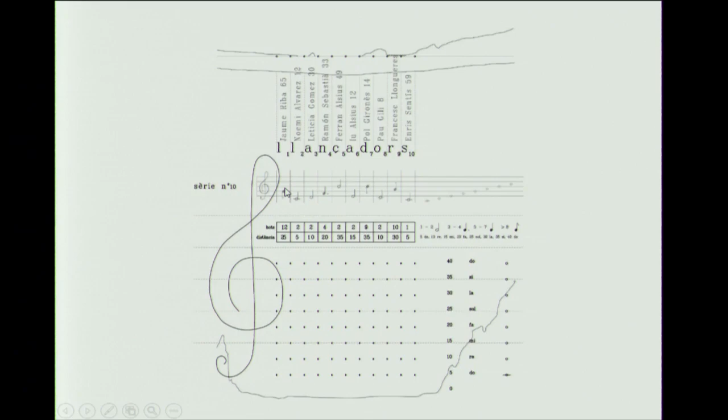Distance 25 is 1 sol, 5 is do, 10 is re, and the time is the number of jumps, white, black and point, etc. And then these two spatial datums transform into 1 or 2 registers, acoustic registers, that after the party every year interpretates in the beach.

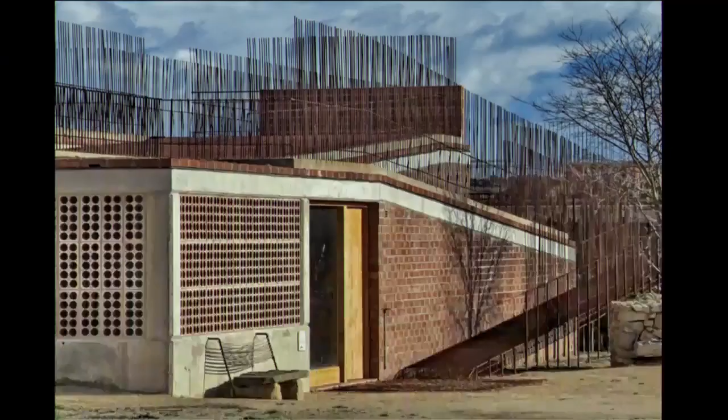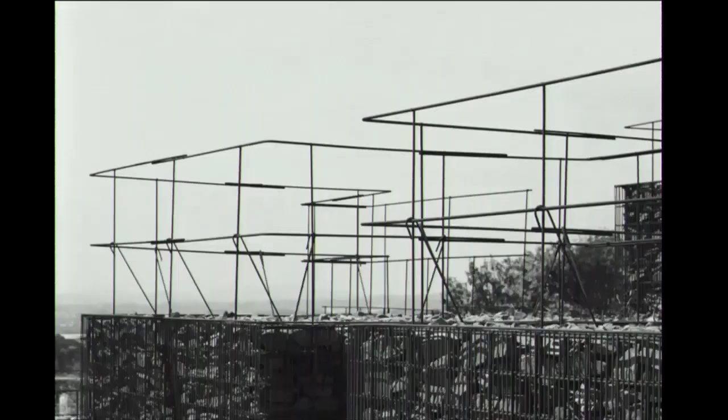And then here we began to think about elasticity in rebars and Tarraco, Ceró, etc., and worked different forms and programs with this material that I use for construction conditions. That is, it doesn't have pathology because it has auto-passivation. This is if you put this kind of steel that is the best steel, it arrives from medieval times, that doesn't have alloys.

After oxidation, if the pores are open, a process of auto-passivation begins, and it protects. The first months you have staining, color around, and after 3, 4, 5 months this process is finished and it stays eternal without maintenance. For this reason, I use this material.

Afterward is the exercise that explains to people who use this material in different programs that one material that 20 years ago people normally don't see, because it's under the concrete, people don't see, maybe if they relax their aesthetic prejudice, they can live with this material. How can you obtain this?

Working with the other senses. Maybe in the Pergola of Barcino, in a conservative environment, a tennis club, people arrive at this space and relax because the temperature is good in this vegetal shadow. They drink a beer, watch sport, or are at the swimming pool, and the visual quality is not the principal thing.

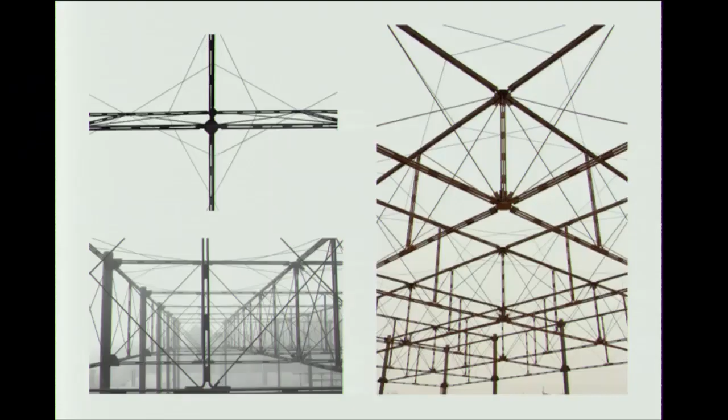Lerida pergola, Tarraco, and more complexity. The ramp of Ceró, the pavement of the ramp, built in the warehouse, combining the artisanal, industrial, prototype, prefabricate, working on site, etc.

The reference in this case: the Agricola men use a 10 millimeter rebar to fix the first lines of the wet package, and with 20 millimeters they work the elastic limit to contain the other lines of the wet package. And with the same material we work in Ceró.

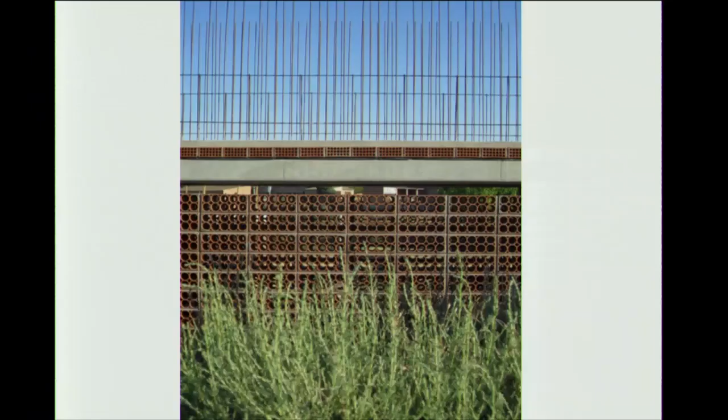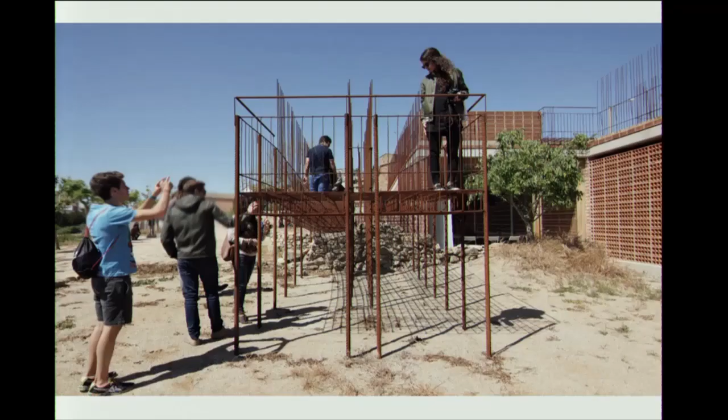Return the view to the church, discover the village, the ancient tree, 3 points of water, needed in summer, the warehouses, the furniture to sit, winter condition, summer condition, the shadow, and you sit here, the bench, the chamber of wine.

The pavement of all the building is this piece turned as a pavement. You normally use, as an evolution of this element, the last line to make the perimeter more monolithic with a zuncho. You turn this element, put here sand and plaster, and here the beams, and you use this ceramic piece, turned, to fabricate this carpet that is in the same geometry as the roof. The beams, the tiles, the same piece, turned here.

Different programs in the polyvalent site: workshops, expositions. Here is this screen where you explain the video of the archaeological site, or watch soccer, Barça, TV Gol, etc.

Or by night, the ramp and this festive light fabricate this carpa, and people of the village sometimes hold celebrations of the community here.